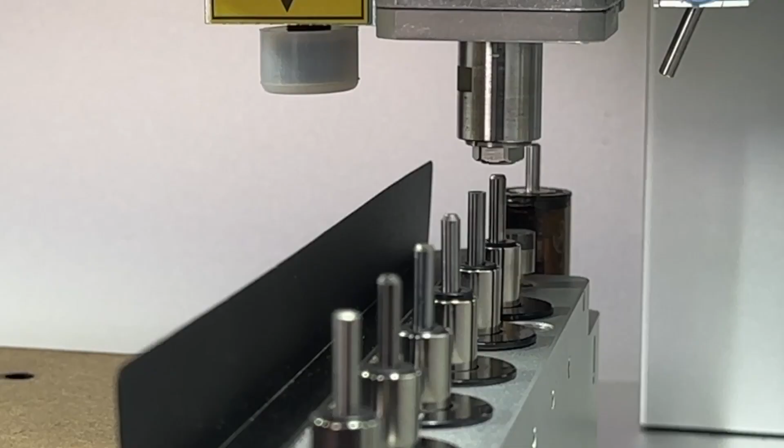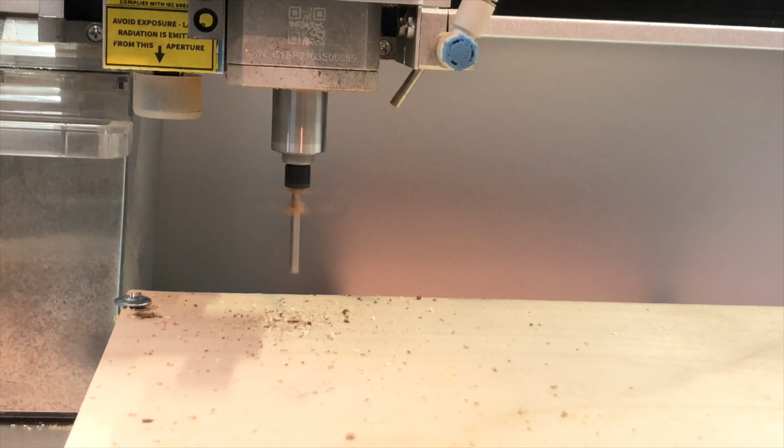Everyone, Jason from Makera here with another project tutorial, and in this one we're going to create a backyard table game using Makera CAM and the Carvera Desktop CNC. Both the Carvera and Carvera Air are highly versatile desktop CNC machines, allowing you to work with a range of materials, bits, and manufacturing processes to create fun projects like this one. And Makera CAM allows you to import a range of file types to easily prepare your designs for manufacturing too. Now in this tutorial, we're going to look at how to create this game from start to finish, so let's get started.

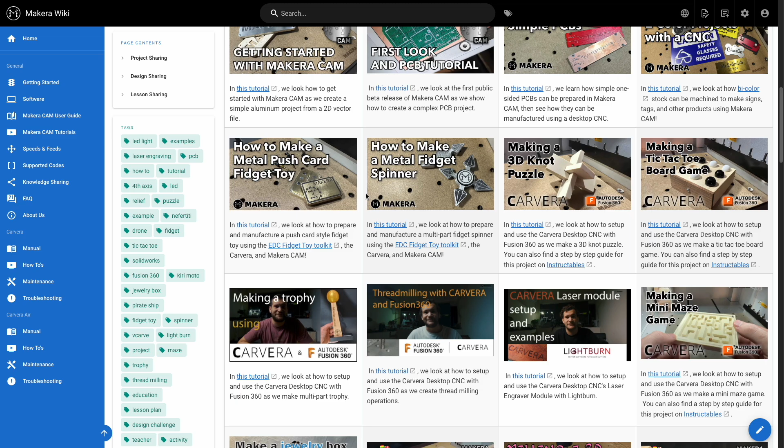You can download the example files used in this tutorial from the knowledge sharing page on our wiki site, or download the completed Makera CAM files instead if you want to get right into machining. There are 3 files needed for this project, one for the top and bottom of the board each, and one for the ball launchers as well, and then an optional file for the engraving design too. Once you have your designs, head over to Makera CAM to begin to prepare them for manufacturing.

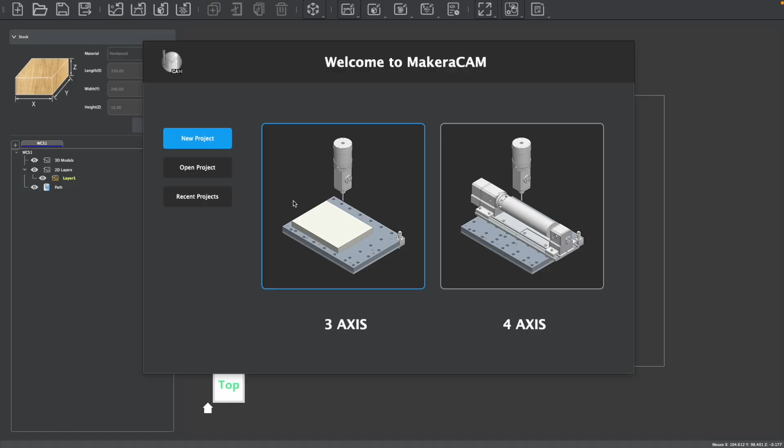So after launching Makera CAM, we can create a new 3-axis project. And the first thing we always want to do whenever we make a new project is to set our stock to match the material that we'll be using. So I'll be using a piece of 3/4 inch plywood, and plywood usually machines best as a hardwood. And the length of my plywood is about 330 millimeters by 240 millimeters by 19 millimeters. And again, it's 3/4 inch plywood, so that's just over 19 mil, but this should be perfectly fine as we're going to machine through.

Whenever you're going to flip something horizontally, like we'll be doing in this 2-sided project, it's really important that your horizontal length is very accurate, right? So that way your part is oriented correctly during the flip. So this is the most important measurement. So make sure you have that down correctly there. And once you've adjusted your stock, you can click OK.

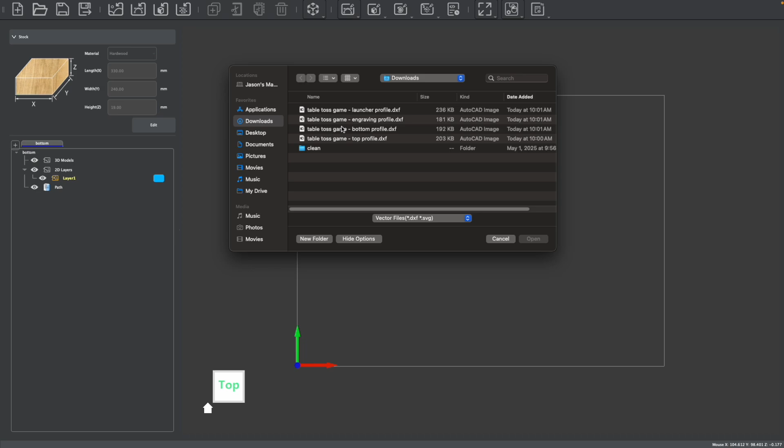Now, this is going to be a 2-sided project, which means we're going to have 2 work coordinate systems. So I'm just going to real quick edit the work coordinate system 1 that we have here, and I'm going to rename this to be bottom, because we're going to machine the bottom first. And then I can import the DXF file for the bottom. So I have my Table Toss Game bottom profile that we've downloaded from the wiki. So I'm going to open this up and import this in, and you can see we have our bottom profile.

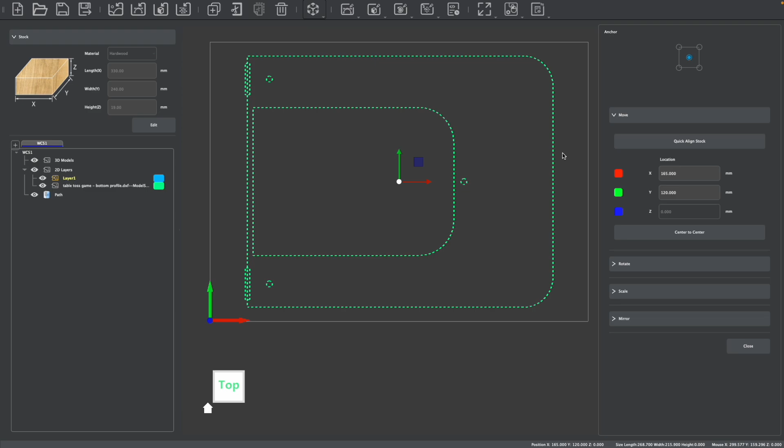So then what we can do is we can select this whole graphic and we can transform it. So I'm going to first rotate it 90 degrees, and then I'm going to align it. And if I click Quick Align Stock, that'll just center it perfectly in my stock here. Okay. Now, before we get too far in preparing the toolpath, let's go ahead and import all of our graphics and align them for the top as we go here.

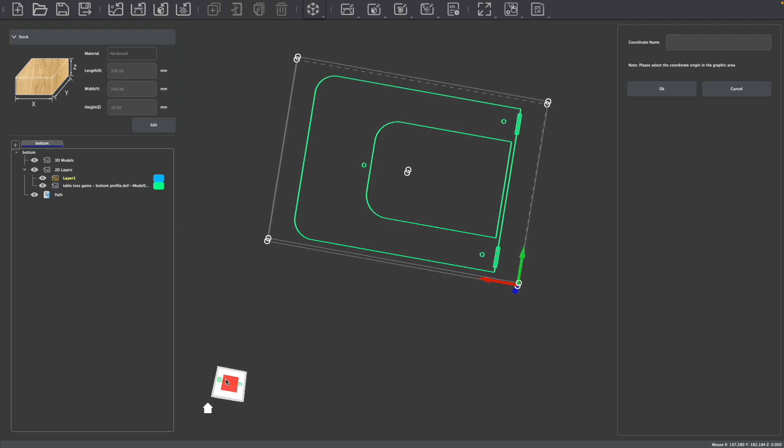So I'm going to click New Coordinate System, and I'm going to rotate this just like I would actually flip my stock. So I'm going to horizontally rotate it here, and we have to select the origin point for what will be the new bottom left corner when we flip our stock, which would be this corner right here. And I can rename this coordinate system to be top. And whenever you make a new coordinate system, you'll see you have a whole new collection of layers and graphics here. So we have different graphics and paths for the bottom and top profile. We can still see the shadow of our bottom profile here.

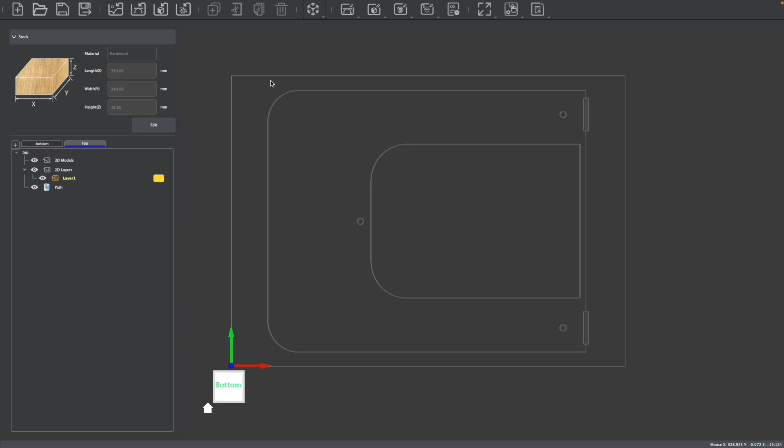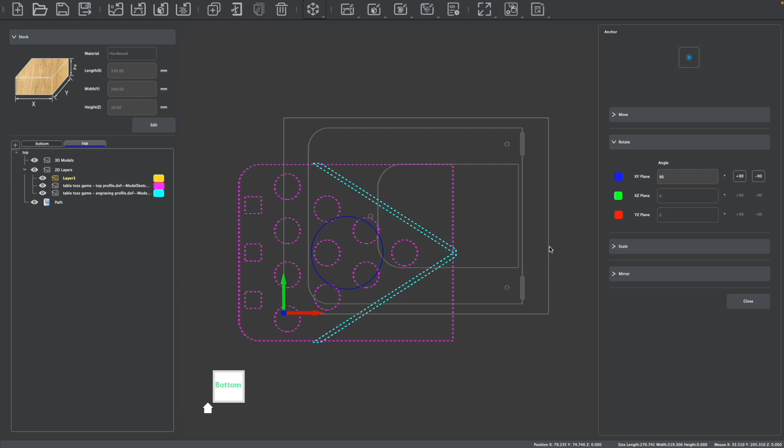So let's go ahead and import the graphics for the top of our design. So that's going to be the top profile. And before I move anything, I'm also going to import the engraving profile, which is optional if you want to engrave this stripe here. I'm then going to select both the top profile and the engraving profile. And again, we can use the transform tool to rotate this. And I can either use Quick Align Stock or manually position this, but I really want to center it perfectly on my bottom graphic. So the easiest way to do that is using center to center.

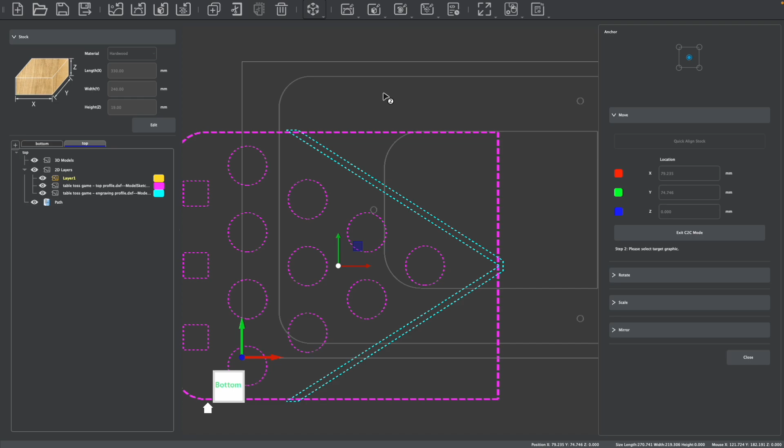So if I click center to center, I'm going to select my reference graphic, which is going to be the outline of this top profile. You can see it's highlighted a little bit more bold now. And I'm going to select my target graphic, which is the outline of my bottom profile. And that will automatically center my designs. And of course, because this is a symmetrical design, top and bottom, we can see that those lines overlap, right? So I'm going to close this.

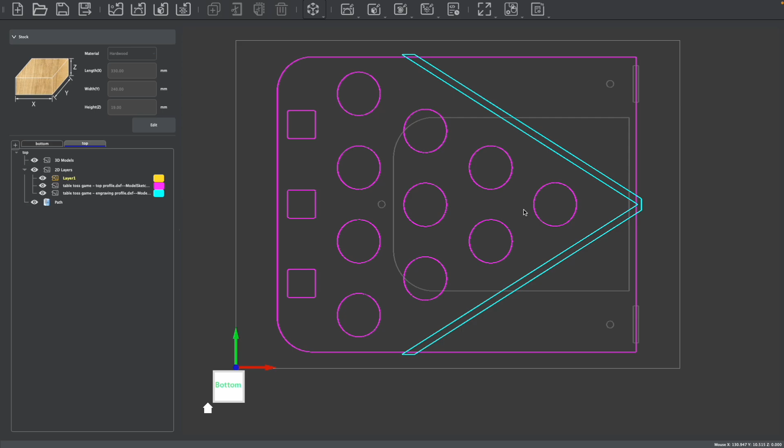Now we have our graphics fully imported for this design, and we have our flip set up, and we can start to prepare our toolpaths. So let's head back over to the bottom work coordinate system. And what we'll do is we're first going to make some alignment holes that we'll use to flip our stock around when we do our horizontal flip. So we're going to use the create tools here to do this. So I'm going to create a new 2D model,

and we're going to make a circle that has a diameter of 1/8 of an inch, or 3.175 mil, or whatever size pins and drill bit you want to use. So I have 1/8 inch alignment pins that I'm going to use, so I'm going to drill an 1/8 inch hole. And I'm just going to go ahead and draw a circle somewhere here on my stock on the left-hand side. It doesn't actually matter where it is in relation to your part, because again, our parts are already aligned.

So as long as we flip our stock horizontally and these pins are perfectly centered on the stock, then that's perfectly fine. So if you're a little high or a little low in terms of the center point of your design here, that's not actually going to make a difference. So it's not really crucial where this is. However, if you did want to set a really accurate position for this, you could head over to the transform tools and go to the move tools. You could manually set X and Y positions and align this perfectly.

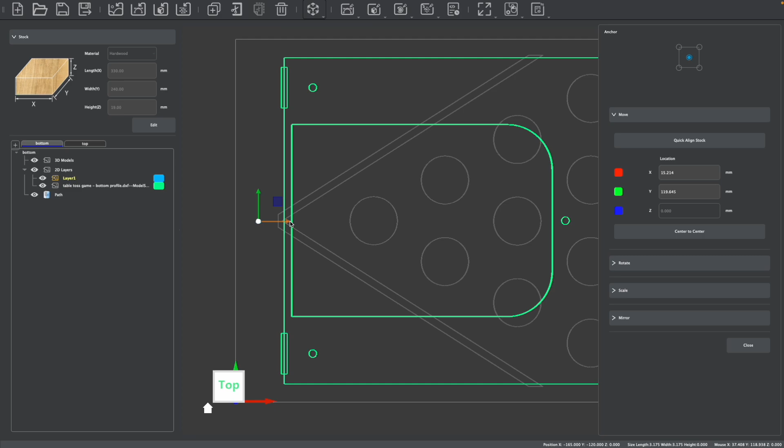But what we're going to do is we're actually going to mirror this over our stock center. So I'm going to click mirror down here, and I want to create a copy of this hole, and I'm going to mirror it horizontally over the stock center, not the center of the shape. So if I click generate mirror, you'll see that that gave me a hole on the other side, perfectly centered on my stock. So this is where I mentioned that 330 mil length of your stock is really important. So that way when you flip this guy horizontally, everything is nice and aligned for your top and bottom. So we have these holes. I'm going to close that.

And with the holes still selected, this will be our first toolpath. We're going to create a 2D drilling operation to drill through our board and also into a piece of wasteboard below, so that way we can insert our alignment pins for the flip. So the end depth needs to be much past the stock, right? We need to drill through the stock and also deep enough into a piece of wasteboard for our alignment pins. So that's going to be, for me, about 25 millimeters. So that should be a nice hole depth of about 5 or 6 mil after I drill through my 19 mil or so stock, right?

And then we don't need to change our clearance heights or anything like that, probably, unless you're using any types of fancy fixtures, but we do need to select a tool. And you would typically grab a drill bit for this, but I don't actually have a drill bit long enough to do this hole. So I'm going to use a single flute end mill, and I'm going to select my 32 millimeter single flute end mill, and I'll just do a drilling operation with this single flute flat end mill. And as long as I have retract enabled, that should be perfectly fine.

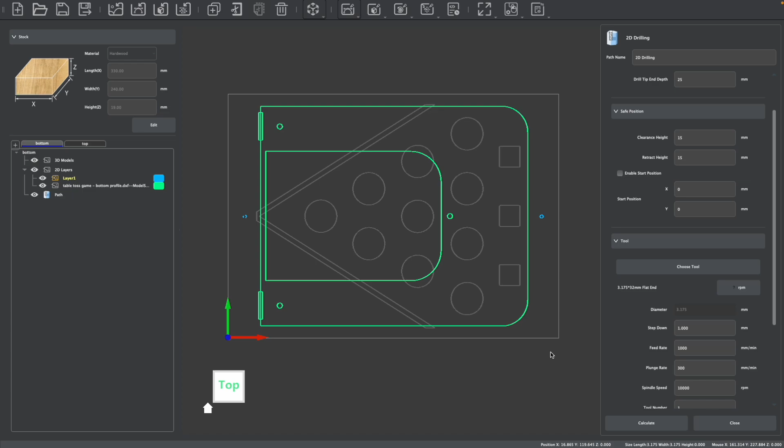So I've selected this end mill. You'll see that hardwood is selected for my machining feeds and speeds based on our stock that we set earlier. And I'm not going to change any of the defaults. The only thing I'm going to do is change my tool number, because I'm going to have this 32 millimeter end mill assigned to slot 2 in my Carvera's automatic tool changer.

So you can assign the tool number as needed. And then again, this is where I said we want to have a peck drilling function. So let's enable a fixed Z height retract, and 1 millimeter is fine. So that means that each step down, each millimeter step down, this drill bit or end mill will back out to a fixed height of 1 millimeter. So that way it's not just plunging straight through. That should stop us from breaking our bit and also overheating or burning anything and causing any damage there.

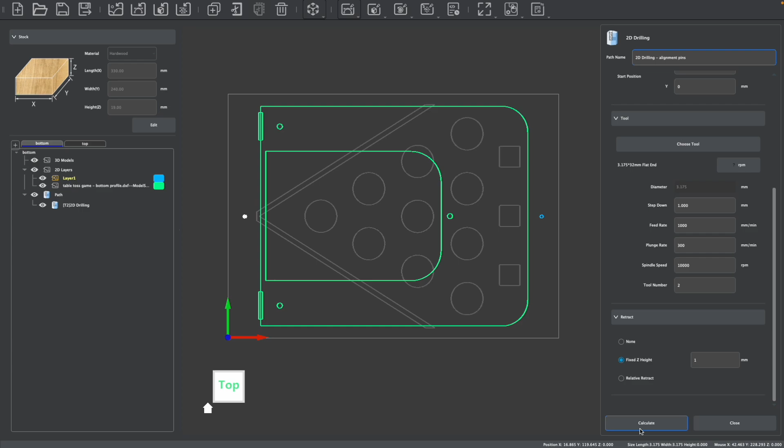So we'll drill a little bit more slowly. So we can calculate that. And when you have a lot of toolpaths, it's always a good idea to keep yourself nice and organized. So I'm actually going to rename this path to be 2D drilling alignment pins, like so. And that'll just keep my layers here nice and organized.

So let's close this. And the next thing we'll do is we have a bunch of pockets to clear out, right? So I have these little magnet holes that will hold us shut when the board is shut there. So I'm going to select my 3 magnet holes, and let's create our first 2D pocket operation. I'm going to name this to be 2D pocket magnets. My end depth can just be 2 mil for my magnets here. So we'll go 2.5 mil for the magnets that I'm using. So end depth of 2.5.

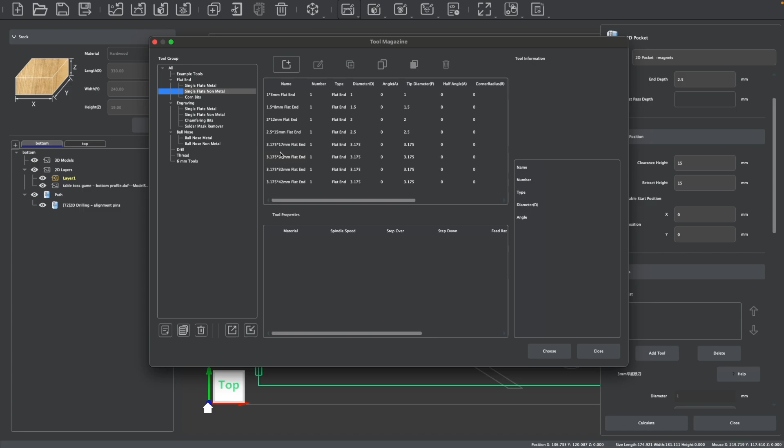For the tool for this guy, you can use a lot of different tools. I'm going to use my 25 millimeter end mill, which is honestly quite a bit longer than what I need, of course, to do just a 2.5 hole. So ideally, you'd use a shorter bit, maybe a 12 millimeter end mill or something like that. But I want to use as few tools as possible, do as few tool changes as possible.

So a 3.175 by 25 millimeter end mill set to hardwood should work fine. So I'm going to choose that. Again, default feeds and speeds are great. You can check your tool number, but I do have this loaded. This is one of our example tools, so this is loaded in tool slot 1.

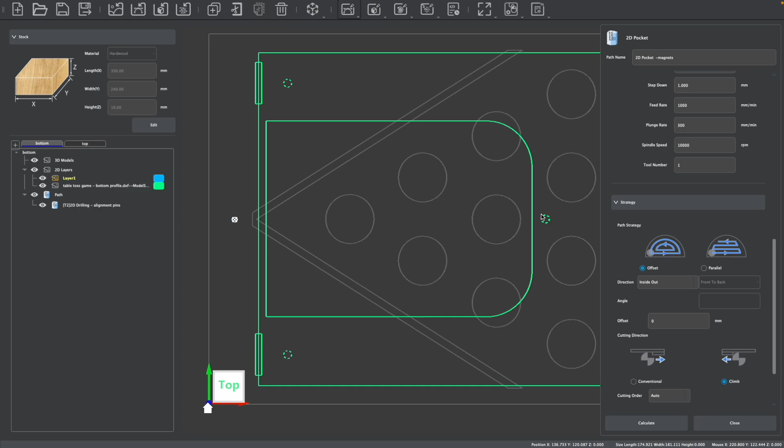Path strategy, we can do offset, which will work fine for working around these concentric holes. We don't have to change any other settings. We don't need ramping because it's not a very hard material. So I can just go ahead and calculate these pockets. There we go. All right.

Next toolpath that we'll do is our hinge pins. And this is going to be another 2D pocket. So I'm going to hold shift and select the 2 hinge pins. And we'll make another 2D pocket. I'll rename this to be hinges. And the reason that we're doing this as a separate toolpath is we have a very different end depth. So I'm going to set the end depth for this guy to be 12 millimeters. Everything else is going to be the same.

So same tool, same feeds and speeds, same tool number, offset strategy, still fine, no ramping needed. So I can just very quickly click calculate because Makera CAM will keep the same settings as your previous toolpath, which is kind of convenient. So there we go. That's nice and good.

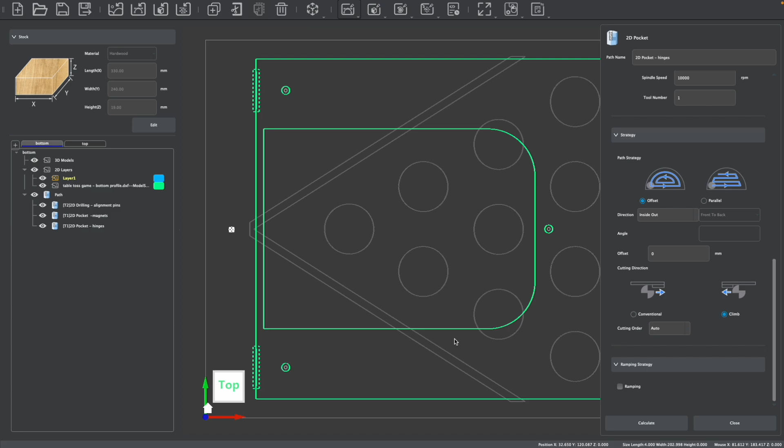And you know what? Actually, this center pocket is also going to be a depth of 12 millimeters. However, I'm going to use a different strategy for this center pocket to clear it out a little bit quicker. So I can close this and create one more 2D pocket toolpath. This time we're going to select this center pocket, and I'm going to call this center pocket.

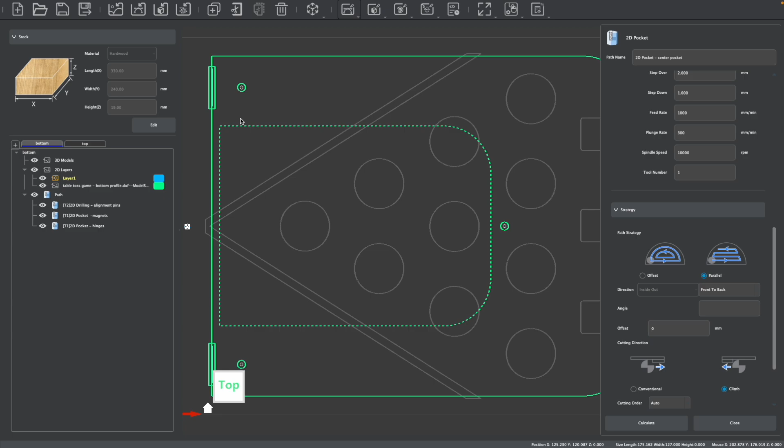Same depth, same bits, same feeds and speeds, but for this one, we're going to set a parallel strategy, which instead of working around in a concentric pattern like this, it's going to pan back and forth. And that's usually better for clearing out a large amount of material. So we'll set this to be a parallel strategy. Again, no ramping is needed, so we can calculate that.

If I just zoom out for a second and orbit around, you'll see that we have all of our toolpaths here drawn so far. So we have our nice little toolpath lines there. And looking at that, it looks like I missed a hole for my alignment pin.

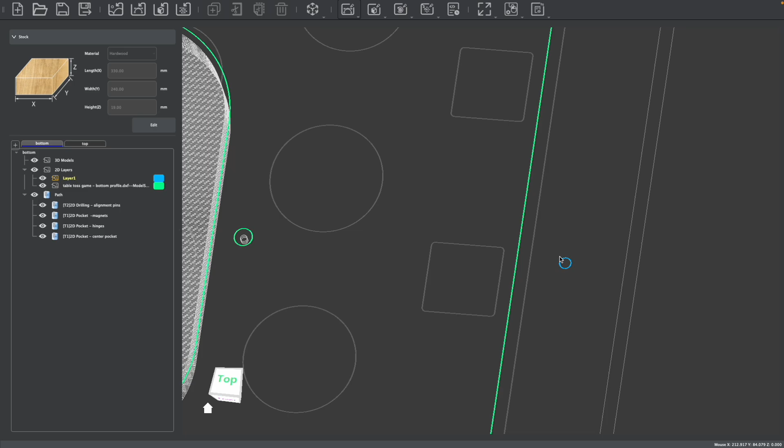Let me go back into my alignment pins and make sure that both of my holes have been selected. Looks like I accidentally missed one of them. Let me recalculate. There we go.

So we have one more toolpath to do for the bottom, and that is just going to be a chamfered lip. We're not going to cut all the way through our part, so we'll save that for the top side, but we are going to do a chamfered edge so that when it does cut all the way through, you'll have a nice chamfered finish, sort of like a routed edge. So let's select our outline and create a 2D chamfering toolpath.

Our chamfer depth for this could be 0.5 mil. You could, of course, adjust that if you wanted to chamfer a little bit more or less. And then the tip offset is going to be 0.2 for the size chamfering bit that I'm going to use.

Then we're going to go ahead and choose our tool, and from the examples tools, I'm going to grab our 0.1 mil 90-degree chamfering bit. Hardwood selected to be our feeds and speeds. If you wanted to change these, you could, but I think the defaults should be just fine. You could, of course, change your tool number, but this is loaded in tool 6 for me, so that's perfect.

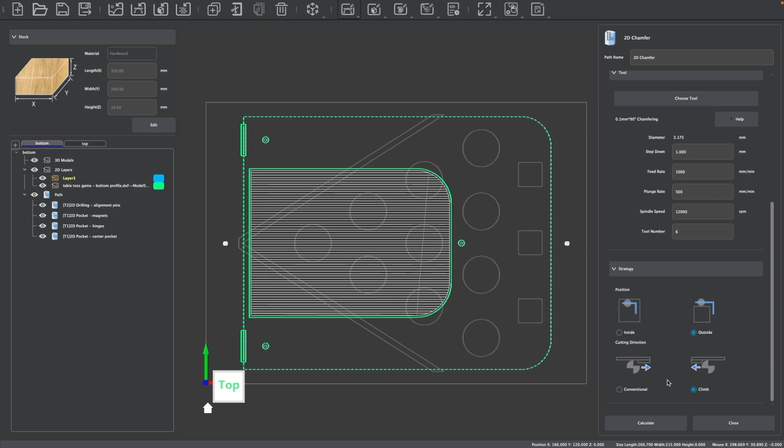We want to run along the outside of our part, and climb milling is perfectly fine. So I can calculate this, and you'll see that we have a very small chamfering line that runs along the outside of our part. So I'm going to close that.

I didn't name this one because it's kind of obvious, 2D chamfer. We only have one chamfering toolpath. And if I hide my designs so we can just see the toolpaths, you'll see that we have everything prepared for the bottom. It's a good time to press save if you haven't yet, so we can save this project.

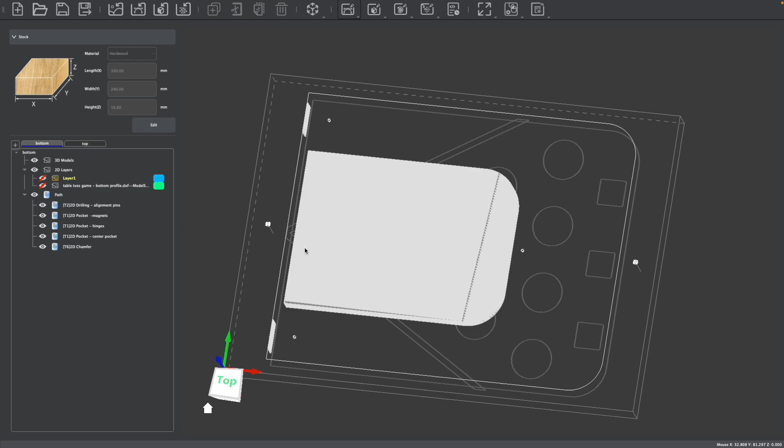And then we can head on over to prepare the top, right? I'm sorry, this is everything that we have prepared for the bottom. Now we can flip and head over to our top graphics.

And if you find that it's a little distracting to see the toolpaths on the bottom, you could always hide your toolpaths, so that when you flip and look at the top, all you see is your top design. So the first thing you might want to do is this engraving profile, depending on how you're going to make the engraving profile. I'm going to use the laser to actually engrave this, the built-in laser of the Carvera or the optional laser for the Carvera Air. So I'm going to save this for the end.

But if you were going to mill it, if you were going to do, let's say, a 2D pocket using a V-bit or a ball nose bit to actually clear this out and engrave it using a milling function, you'd probably want to do that first because you typically start with your smallest operations and then move to your biggest ones. But again, I'm going to save this one for the end because I'm going to use the laser.

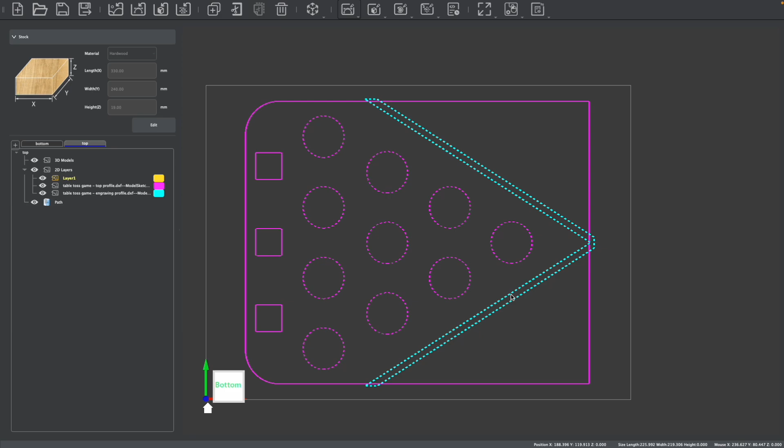So my first operation is actually going to be all of these holes for the cups here. So if I just select my holes and deselect my engraving profile, we can go ahead and create a 2D pocket. And these are going to be for the cups, so I'll name this to be cups.

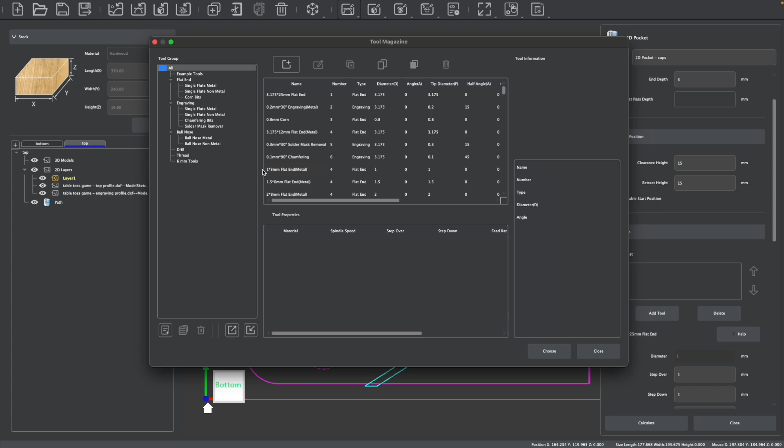And then our end depth for this could be pretty shallow, so I'm going to do 3 mil for our end depth. And then for our tool, I'm going to select the same 25 millimeter end mill that I was using earlier, same feeds and speeds, same tool number. We can do an offset strategy for this, and no ramping is needed. So I can just calculate that real quick.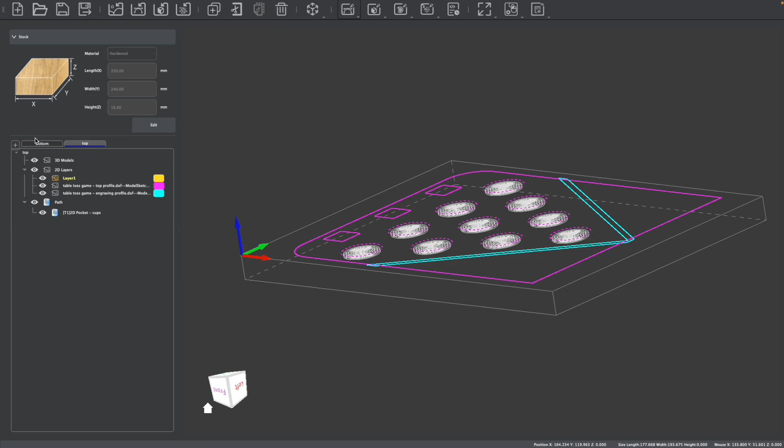And actually, what we want to check real quick is to make sure that we're not going to accidentally interfere with our bottom pocket. So let me head back over to the bottom, enable our toolpaths, and then when I look at this from the top, we want to make sure that I don't accidentally plunge. If I look at this just from a side profile, I'm not going to accidentally plunge in.

So you can see we have plenty of buffer here. That looks perfectly fine in terms of our 3 millimeter holes there. So that's good. All right.

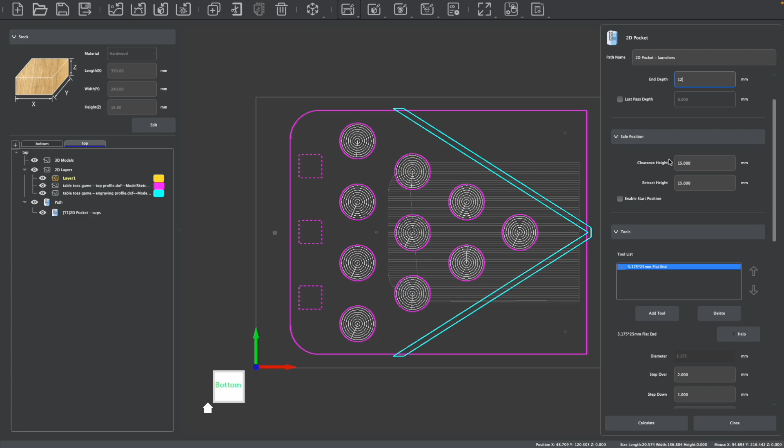Next, we're going to do the pockets for the launchers. I'm going to grab these 3 square pockets and make a 2D pocket toolpath. We'll call this launchers. These guys are going to be milled quite a bit deeper, so I'm going to mill this down to 12 millimeters, so that the launchers can slot in for our table game. Same bit though, same feeds and speeds, same strategy, so I can go ahead and click calculate. Again, the only reason we had to make this a separate toolpath is because we have 2 different end depths, right? 2 different end depths.

And then we have our outer line here. So the first thing we're going to do is we're actually going to cut all the way through. Let's go ahead and select this outer line and make a 2D contour toolpath. Okay, this is the first contour toolpath we've made, right? This is going to be our outer profile. Our end depth is going to have to go through our stock, so for me I'll make that 20.5 mil, just a bit over.

Again, I'm using 3/4 inch, so it's not quite 19 millimeters. It's a little bit thicker than that, so I want to make sure I go all the way through my plywood. So I'm going to go to a depth of 20.5 mils, like so.

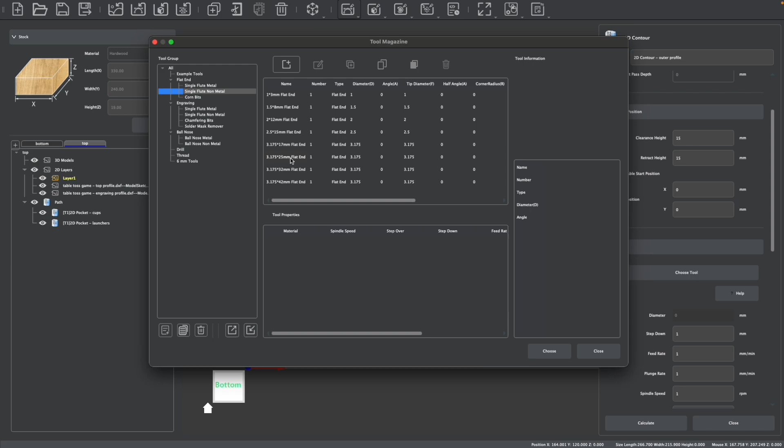I'm going to need a nice long tool to do this. In theory, the 25 millimeter end mill is long enough, but when that's cutting really deep, there's not going to be a lot of bit left, and that could be getting a little hot. It's also not going to allow for really good chip evacuation if I'm putting this bit pretty much to its full depth. So I already have the 32 millimeter bit ready to go.

So I'm going to select my 3.175 by 32 millimeter bit, set to hardwood. I'm not going to change my feeds and speeds, but I do want to change my number so I don't have to reload my tool changer. So that's tool 2. We want to run along the outside of our profile here, and we do want tabs to hold on to this part as it's machining.

So I'm going to create some custom tabs, and whenever I'm working with wood, I like to use square tabs, and I'm going to make these tabs quite a bit bigger to make sure I hold on here. So I'm going to make them 20 wide by 5 millimeters tall, because it's pretty easy to cut some wood tabs. And I'm just going to click add and maybe add 4 tabs along the perimeter of my design.

I want to avoid the front just because of the hinge pockets that we're going to cut, like here. So there we go. So then let me calculate this. And if I just orbit, you can see we have our part that cuts all the way through our stock, as well as our tabs, which looks great. So we can close this toolpath.

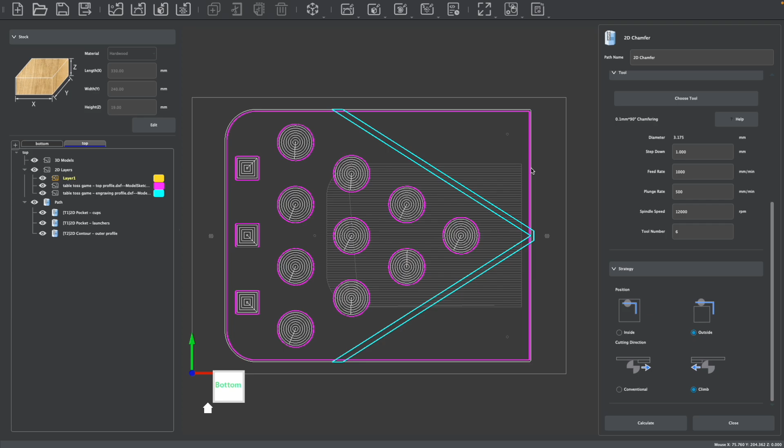And then we're going to do a chamfering path, just like we did on the bottom. So we'll do a chamfering path now that this edge has been cut. We're going to keep the same settings that we did earlier: a depth of 0.5 millimeters, an offset of 0.2 millimeters. We can select our chamfering bit, like so, and we're going to run along the outside. Calculate that. Oops, sorry, let me click on my outline and then calculate that. And now we have our chamfering toolpath.

So there we go. That is the top prepared, like so. We already have the bottom prepared. And then all that's left is this engraving profile, which again, if you were going to mill it, you could have done it much earlier. But because I'm going to use the laser, what I'm going to have to do is vacuum my part really thoroughly before I actually start to laser engrave this, to make sure there's no dust that could possibly ignite during the laser engraving process. So I'm going to save this guy for the end.

So now, with this engraving profile selected, let me make a laser vector toolpath.

I'm going to call this the laser engraving profile. We have to choose the right feeds and speeds for our materials, which you can grab on our wiki site for some good starting points. I know that hardwood typically runs around 500 for the speed and 40 for the power, which should work well.

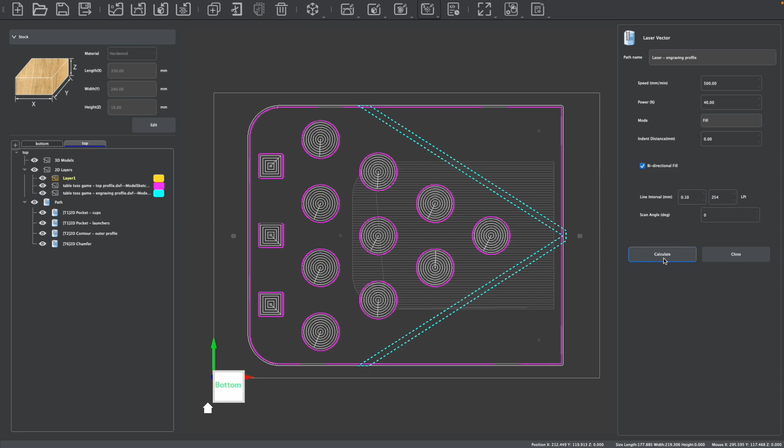The mode here is going to be fill, because I want to engrave this entire stripe. I'm not going to change any of my intervals or angles or things like that, so this should all be fine.

So there we go, now we have all of our toolpaths generated. It's a good time to press save, and all we have to do is export these for machining.

Let me flip back to the bottom. I'm going to right click and save all of these paths at the same time. If you wanted to change any of your tool numbers or double check your tools that you need, now's a good time to do it.

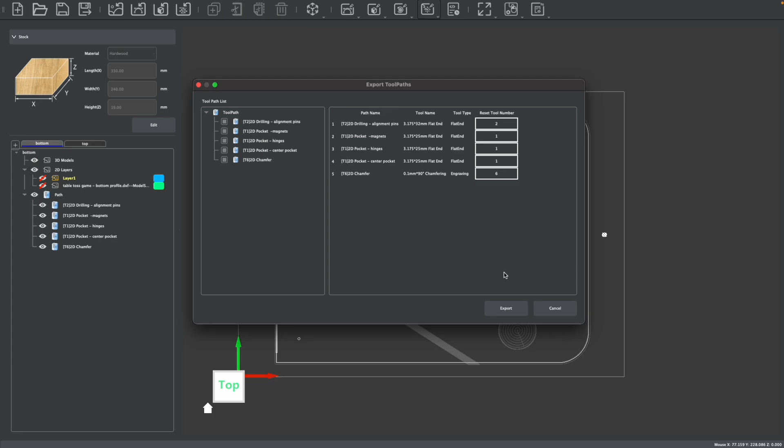Let me export this for the bottom, and let me flip back to the top and export these. But again, I don't want to export the laser as a single toolpath - I want to do that separately so I can pause the machine and prepare it for laser engraving before I do. So I'm going to deselect the laser profile and export this for the top only.

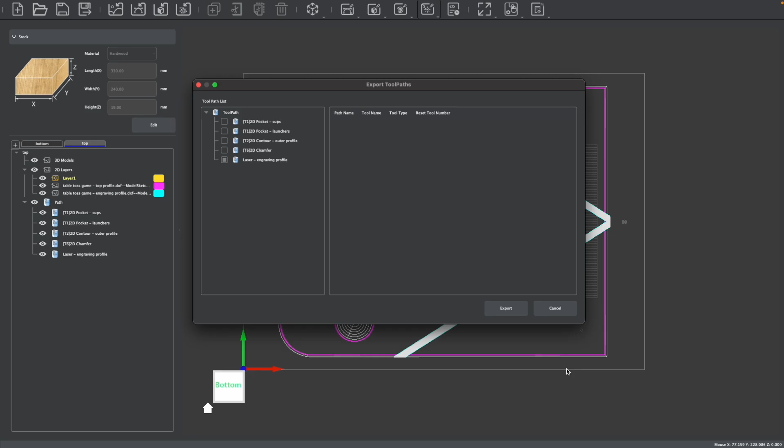Now I'm going to right click just the laser profile and export this on its own, and I'll save this as something different. And we have all of our toolpaths exported for this.

Before we start to manufacture it, we have to prepare our launchers. So after you press save, let's create a new Makera CAM project here, a 3-axis project. I'll be using the same size stock, so I'm not going to adjust this, although there won't be any flipping, and you could also use a much smaller piece of material and adjust your stock size, but I'm going to keep it the same.

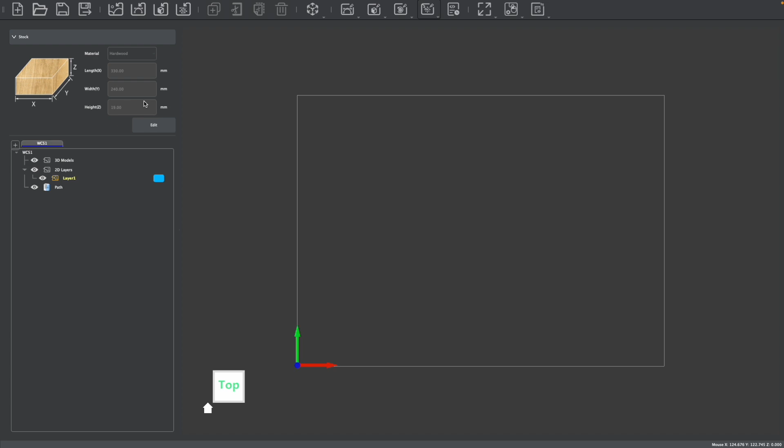With that set, I'm just going to import the launcher profile. The first thing we can do is reposition this on our stock. I'm just going to drag this down to be a little bit closer to my origin point, leaving some room for clamps and things like that.

As you can see, you need a much smaller piece of stock, so you could also adjust your stock size, but you can always reposition this later in the Carvera Controller app, which we'll look at in a few moments.

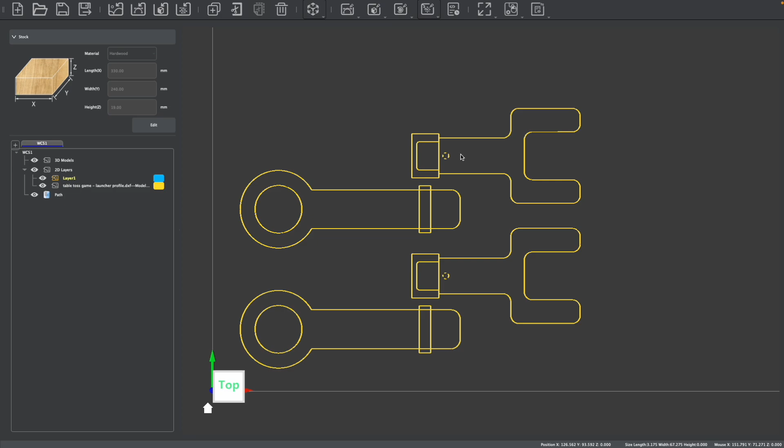So let's prepare our toolpaths for this. The first thing I'm going to do is machine these holes for some pins we're going to insert. Let me select these two holes, and we can create a 2D drilling operation.

For this, we want to drill just a little bit in - we don't have to drill all the way through. These are going to be pins that actually hold some rubber bands for our launchers, so I'm going to set my end depth to be 5 millimeters.

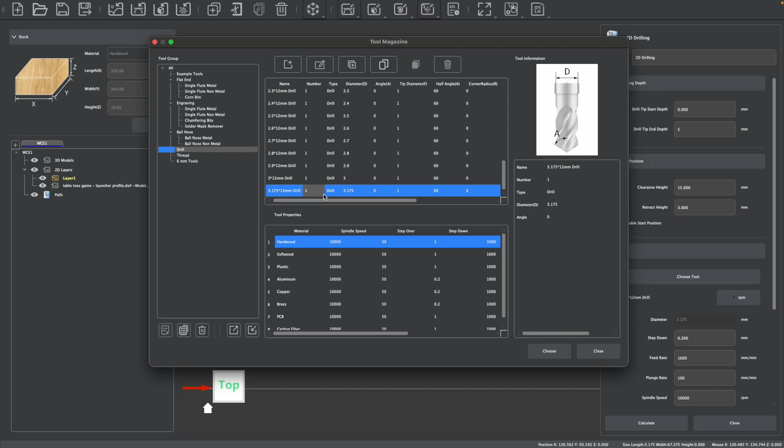I'm going to choose a drill bit for this that I have - a 3.175 by 12 millimeter drill, with my feeds and speeds set to hardwood. I have this loaded in tool slot 4, so I'm not going to change any of my feeds or speeds, but I do want to change my tool number to match where I have this in my tool changer, if you're using the Carvera.

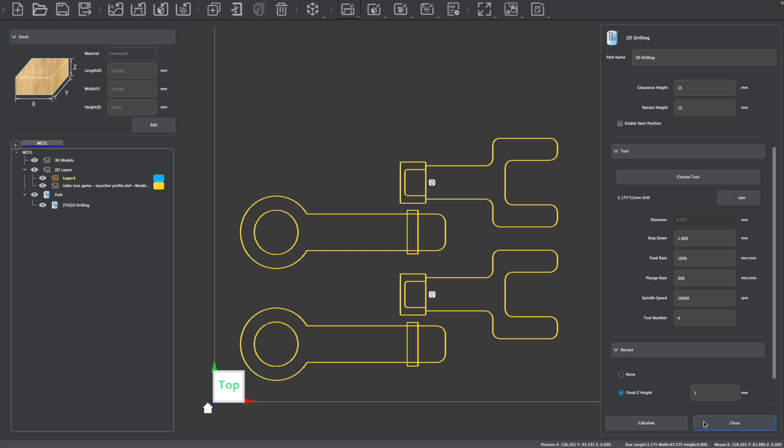And we do want to use a retract like we did before, so I'm going to keep my fixed Z height retract and calculate this. Alright, and then we can close that and move on to our next toolpath.

Which are going to be a bunch of pockets - we have the pockets here, these circular pockets for the ball, we have these two square pockets for a little rubber band, and then we have these pockets, which we're going to use to make our launcher fit a little bit more loosely in our board so you can swivel it around.

So I'm going to hold shift and select all of these pockets, all of them here - so we have 6 pockets.

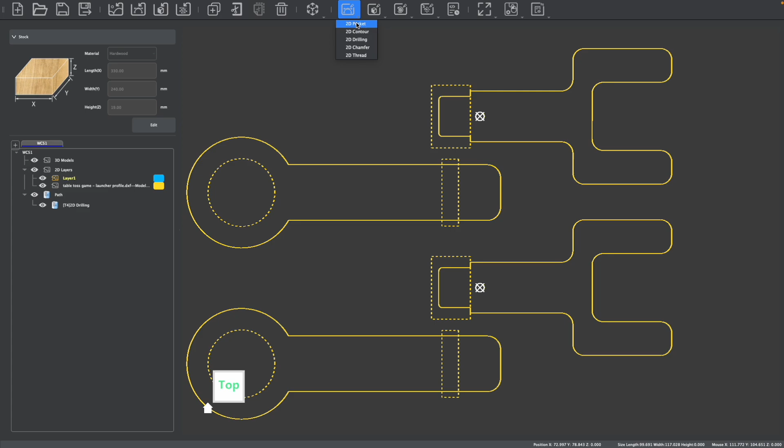And I'm going to use one toolpath because they're all going to be cut to be the same depth. So 2D pocket, and I'm going to set a depth of anywhere between like 3 and 5 millimeters should work fine. That'll change essentially how loose everything fits together. So I'm going to leave this to be 5 millimeters, should be okay.

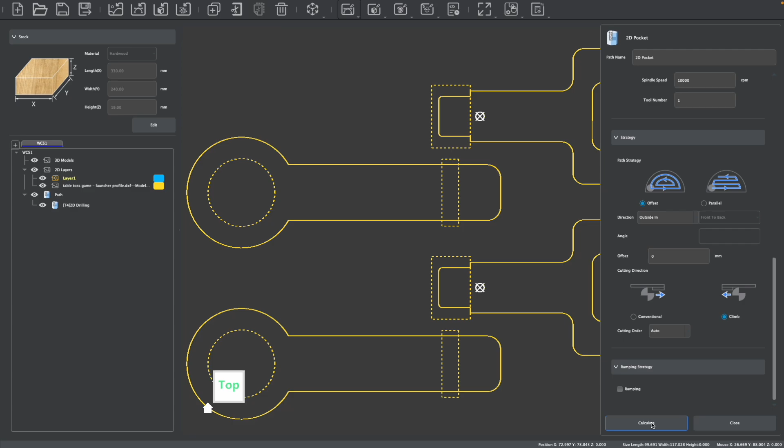I'll set this to be an offset strategy, which should work fine for all of these smaller pockets, and I don't need any ramping or anything like that, so we can just go ahead and click calculate, and that will calculate all of these pockets here to be the same depth. If you want to machine these at different depths, you could of course make different toolpaths like we did for the board, but I think for this launcher, this should work perfectly fine. So we can close that.

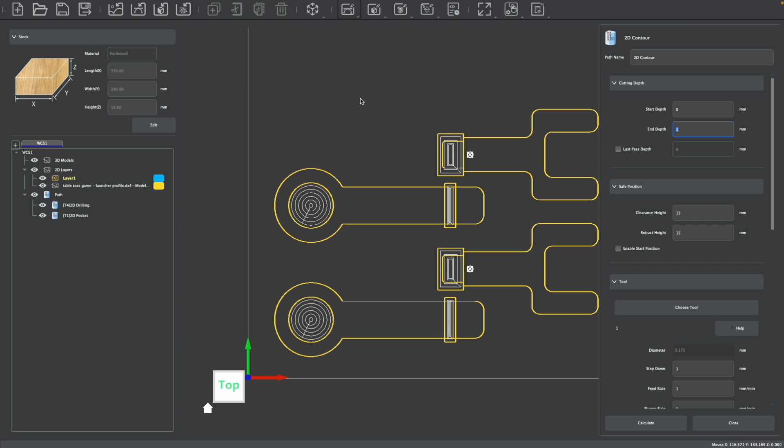And then the last thing we need to do is machine our contours to actually cut out each of these launcher parts. So let's create a 2D contour toolpath. Okay. The end depth has to plunge all the way through our stock, so I'll use the same 20.5 mil that I did for the board. We need a bit long enough to do that, and as discussed, I'm going to use my 32mm end mill to do this. So I can select that tool. I'm going to change my tool number to match where I have that loaded in tool slot 2.

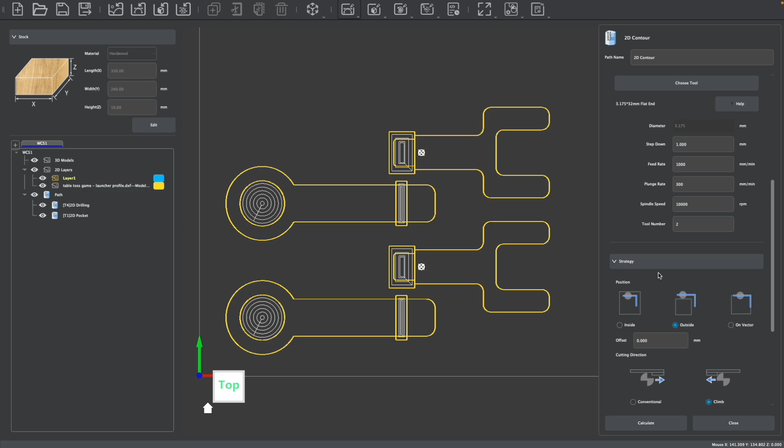And we're going to run along the outside of all of our lines here. I also need to make sure that the lines are selected. So holding Shift, I'm going to select all 4 outside profiles too. Then we can enable tabs. And just like before, I'll do rectangular tabs, although I'm going to make them a little bit smaller than what I had on the board. These are much smaller parts. So I'm going to keep them to be 10mm wide, but still 5mm thick.

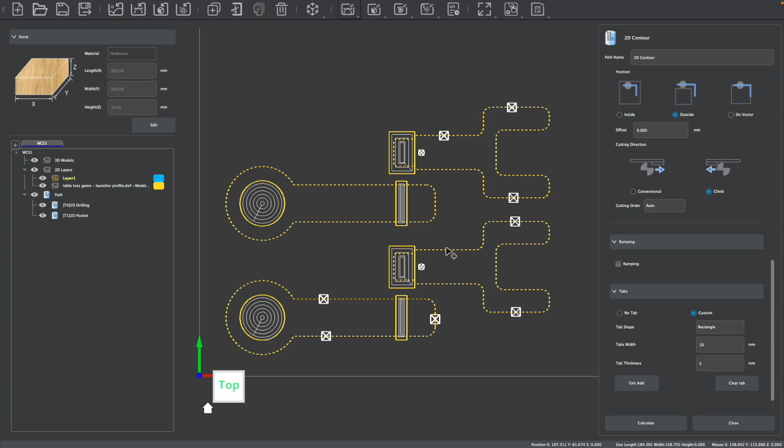And I'm going to place these on my parts on some flat areas. So I'm going to put them on wherever I have some flat edges, avoiding areas that would be really difficult to cut the tabs away. So, for example, I don't want to put them on any of my curves or inside of this inner pocket. That would be a little bit more difficult to cut. So just putting them on flat sides of my parts, and then we can calculate.

All right. So then we have our toolpaths here for everything we need, for our pockets, our pilot holes there, and of course our contour cuts for the launcher. So I'm going to save this and then export these paths. So then we can start to prepare our CNCs for manufacture.

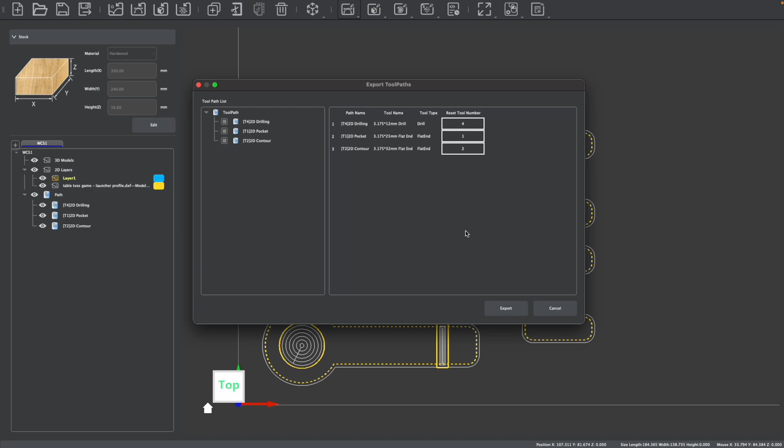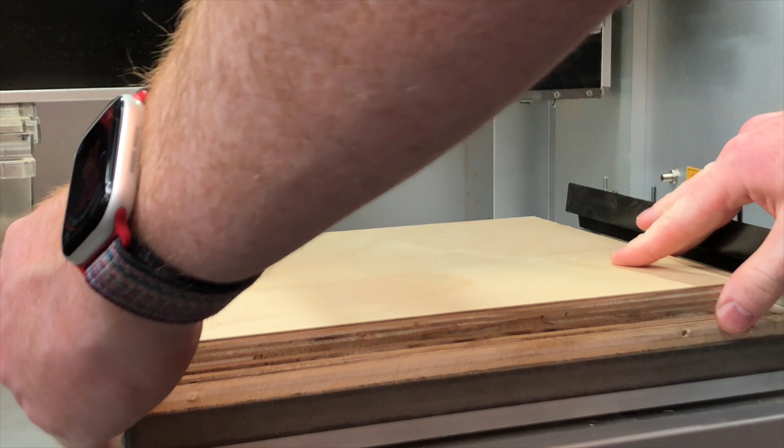As this is a larger design, I'm going to be aligning my stock without using the corner clamp. Additionally, you'll need a thicker piece of wasteboard below your stock so that the alignment pins will be well seated for the flip later on. If your wasteboard has a lot of holes already drilled into it like mine, it's a good idea to mark them before fixing your stock so that way you'll know which ones are the new ones when it's time to insert your pins. With the stock aligned to the edge of my board, I've secured it using some wood screws placed on the outside of my machining area.

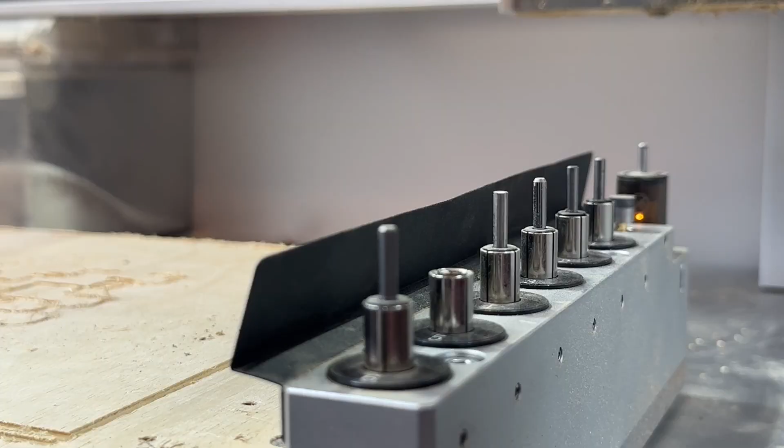We also need to load our tools into the Carvera's automatic tool changer in the slots that correspond to the numbers we assigned in CAM. Starting with the 25mm end mill in slot 1, then the 32mm end mill in slot 2, and then the chamfering bit in slot 6, we should be ready to start these parts. And as this project will be generating a lot of dust and some really big chips, I've decided not to use the Carvera's built-in vacuum, but instead use a larger external vacuum and monitor my machine during the machining process to safely clear these chips manually.

Now moving into the Makera controller app, we can upload our GCode files to our machine for manufacturing. Using the Files menu, I'm selecting all 4 of the GCode files we created earlier and uploading them to my Carvera. With the files uploaded, the Carvera can continue to manufacture them even if I disconnect my computer. Once completed, I can select the file for the bottom of the board to start the manufacturing process.

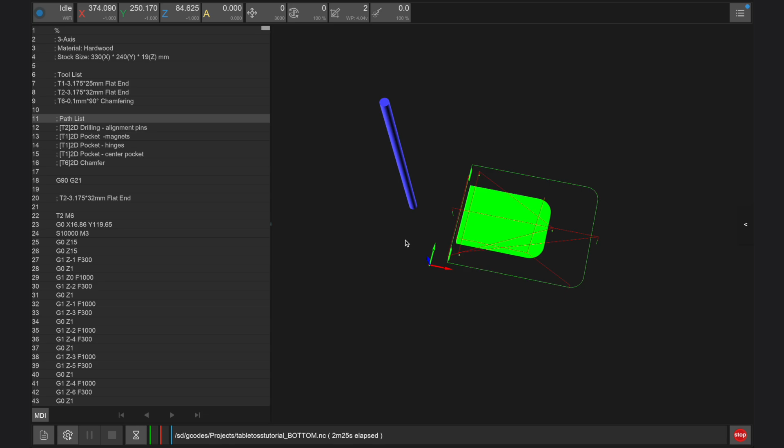In the Config and Run window, we can set up our project. As we're not using the corner clamp, we need to adjust our work origin to be in the corner of the bed, which will be a position of -15mm in the X and Y offsets. We can then enable scan margin, which will trace the perimeter of our design before machining, allowing us to check its location and to ensure that no screws or clamps are in the way.

And we want to enable auto Z probe, which will probe the height of the stock to measure its thickness automatically. We could enable auto leveling as well if we're using a rough piece of stock or one that's either warped or doesn't have a consistent thickness, as this will automatically compensate for any deviations in your stock thickness. But plywood's pretty consistent, so I'm not going to enable this, and once set, I can press Run to begin to manufacture the bottom of my board.

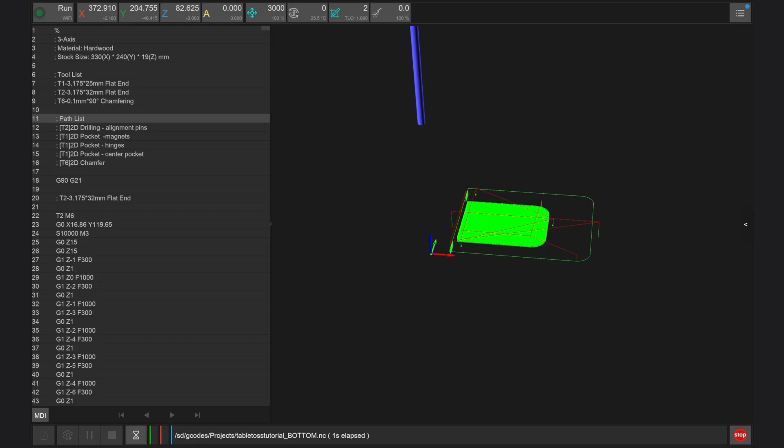After completing the scan margin and probing operations with the wireless probe, the Carvera will pick up tool 2, used to drill the holes for the alignment pins through a peck drilling operation. Next, the Carvera will automatically select tool 1, the 25mm end mill, and begin to machine the different pockets in our design, starting with the magnet holes, before then machining the slots for the hinges, followed by the large storage pocket in the center of the board.

This larger pocket will take a long time to clear with such a small bit and also generate a lot of chips. Keep an eye on your machine to ensure that all hot shavings and dust is being cleared away effectively for a safer and cleaner finish.

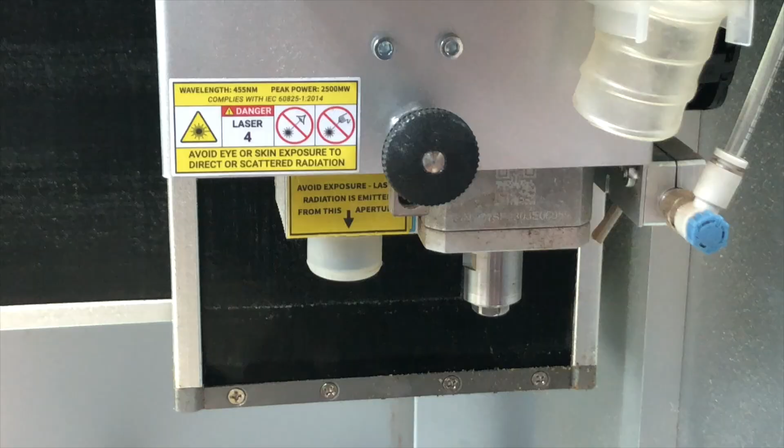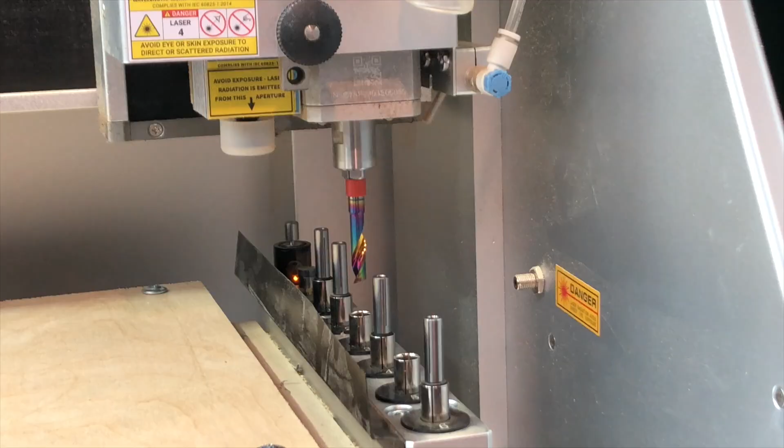This would also be a good opportunity to utilize different size spindle collets for the Carvera or Carvera Air, as these will allow you to work with a larger bit shank diameter to clear out material more quickly in circumstances like this. And the bit adapters available in the Makera store allow you to combine larger and smaller shank diameter bits, meaning that a small bit can be used for the smaller pockets in our design, while the larger bit can be used to clear out the bigger areas and cut down overall machine time.

Once the center pocket has been cleared, the Carvera will grab the chamfering bit to create a chamfered cut around our design. With the bottom finished, we can vacuum the part before unscrewing it from the bed of our CNC. Clear any dust off the bed of your machine, then insert your alignment pins into the holes drilled in our first operation. You can then flip your stock horizontally and align it over the pins so that the recently machined bottom is now touching the bed. With the pins still inserted, re-secure your stock with screws before removing the pins.

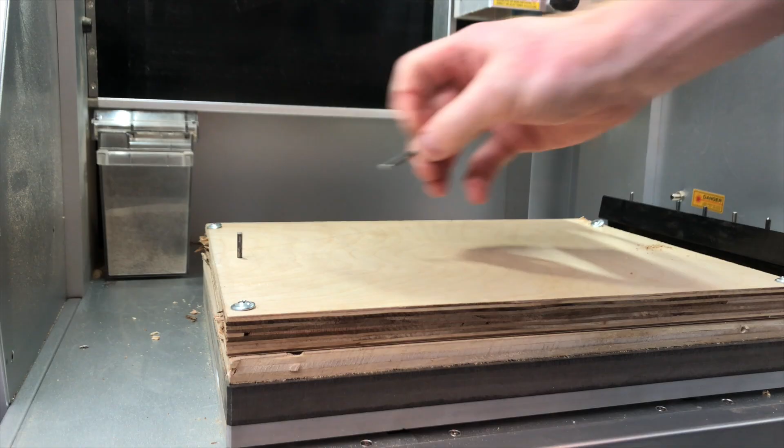Back in the Makera controller app, we can load and configure the G-code for the top of our design using the same offsets and settings that we did earlier. Once set, press Run. After the probing sequence, the Carvera will begin by machining the pockets using Tool 1, starting with the cup holes, then followed by the launcher holes. Again, ensure you're clearing dust during the manufacturing process as needed.

The Carvera will then select the longer end mill from slot 2 to cut out the part through our contour toolpath while keeping the part secured with the tabs. Lastly, the Carvera will grab the chamfering bit to create a chamfered edge on the top of our part as the job finishes.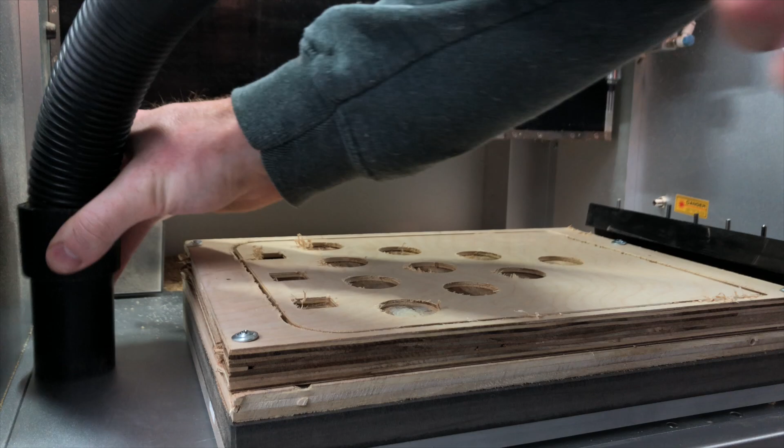Now, as I've chosen to laser engrave the engraving design rather than machine it through a milling operation, I now need to thoroughly clean the work area of any dust which could ignite during the engraving process. I also need to remove the protective cap over the lens of my laser and ensure that I'm working in a safe and well-ventilated environment for laser engraving. Back in the controller app, we can load our G-code for the engraving steps before configuring it for manufacturing.

We want to keep the same work origin offsets and again use scan margin and auto Z probe, which is used for setting the focal length of our laser. But we want to adjust where the auto Z probe measurement is taken from, as we need to ensure that the probing is on the surface of the stock, not inside one of those pockets that we machined earlier. So I've adjusted the auto probe location offsets to be 150 in the X-axis and 40 in the Y-axis from the path origin, just to make sure I don't accidentally probe into one of the pockets that's been machined.

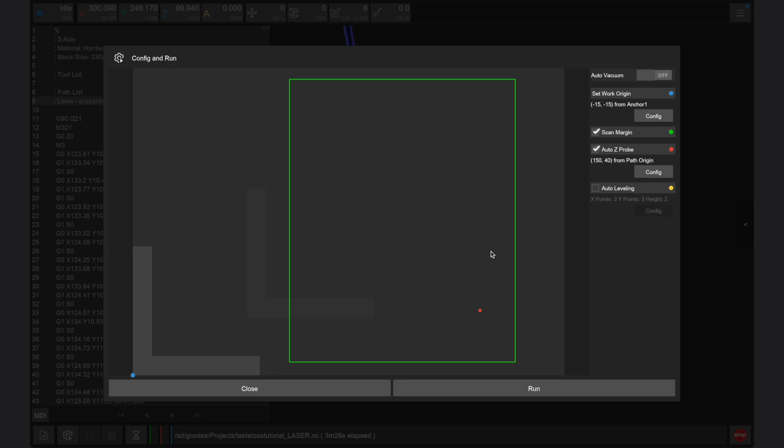Once set, click Run to start engraving. After completing scan margin and probing sequence, the Carvera will begin to engrave the part of the design using the built-in laser module. Again, ensure that you are in a well-ventilated space and always wear eye protection when working around lasers. Once complete, we can unscrew our stock and use a handsaw to carefully cut the tabs holding our design.

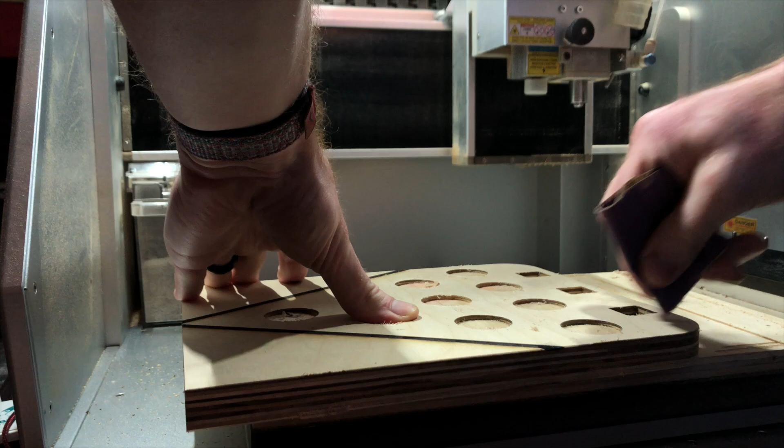We can also use some sandpaper to clean up the areas we cut the tabs off of and clean up any splinters or rougher edges too. You can then repeat these steps to make the same part again for the other side of the game board. And once the parts for the game board are finished, we can then manufacture the launchers.

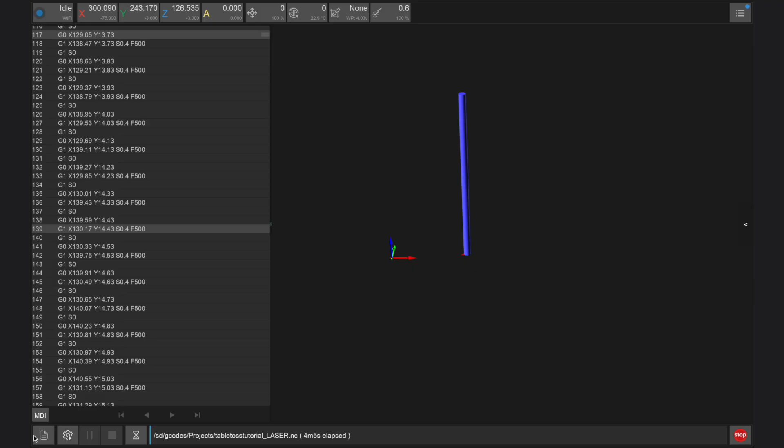Again, start by securing your stock in the bed of your CNC and ensure that your tools are loaded in the correct slots based on your CAM settings. We'll be using the same tools for the launchers, plus a 3.175mm drill bit loaded in slot 4. In the Makera controller app, we can select the G-code file for the launchers uploaded earlier. In the Config and Run window, we'll be using the same settings that we used earlier on, but you can adjust your work origin offsets as needed before running this job.

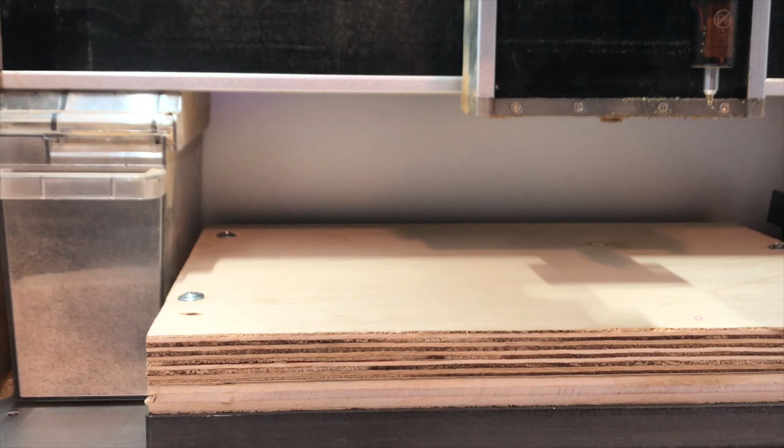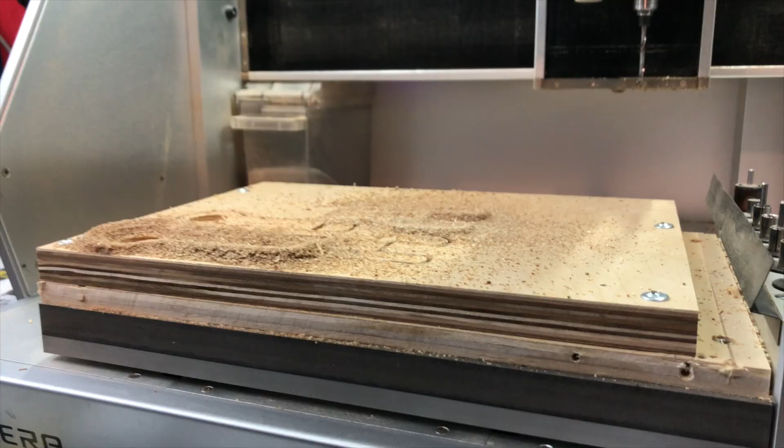After completing scan margin and probing operations, the Carvera will select the drill bit first to drill our 2 dowel holes. Next, the Carvera will use Tool 1 to machine the different pockets in our design, followed by Tool 2 to cut each part out through a contour operation. Once the job is complete, vacuum away any dust and remove the stock from the bed of your CNC. You can then carefully use a handsaw and sandpaper to cut the tabs and clean up the edges of all the launcher parts.

Now, to finish the launchers, we need to carefully drill some additional holes on the side for assembly, either using a handheld drill or a drill press. I'll be using 1/4-inch dowels for my assembly, so I first drilled out the dowel holes made with the Carvera to fit the larger dowels that I have. Next, I drilled holes through the sides of the uprights for the launchers, and then marked holes on the arms of the launchers by placing a pencil through these upright holes. After drilling out the arms, I'm ready for assembly.

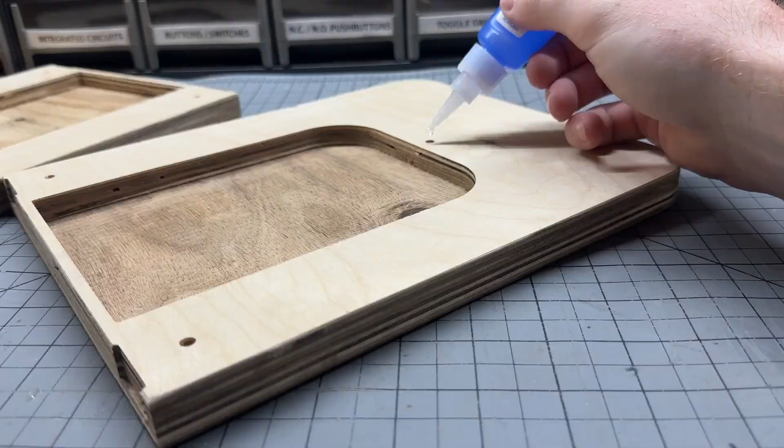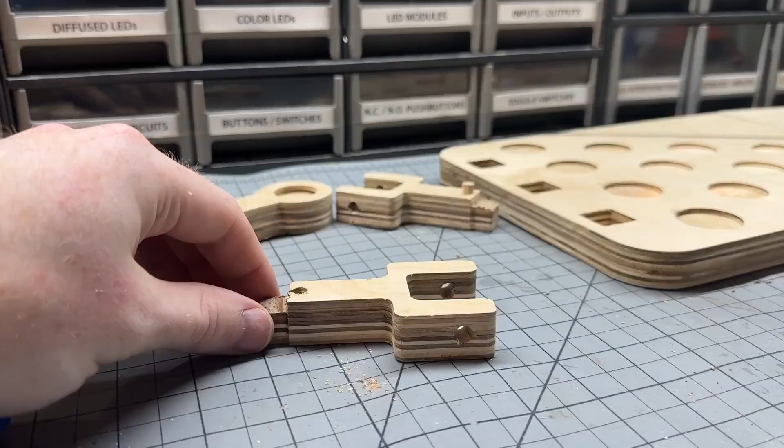The first step for assembly is to glue 3 small magnets into the bottom of each board side. Once the glue dries, align and clamp the 2 halves of the board together and install small 1-inch jewelry box hinges by first drilling pilot holes before inserting the screws for the hinges. To assemble the launchers, you'll need 2 smaller dowels, approximately 20mm in length, and 2 longer ones that are approximately 60mm in length, as well as 2 rubber bands.

The smaller dowels can get pressed and glued into the holes on the front of the uprights, and these are going to be used for holding onto a rubber band. The longer dowels can be inserted through the uprights and arms as a pivot point, but don't glue these as they'll need to be removable for storage. With the launchers assembled, thread your rubber bands around the notch created in the arms and around the lower pin and fire away. You can easily swivel and aim the arm within the board pockets and then disassemble them so they store neatly in the pocket on the bottom of the boards. And that's all there is to it.

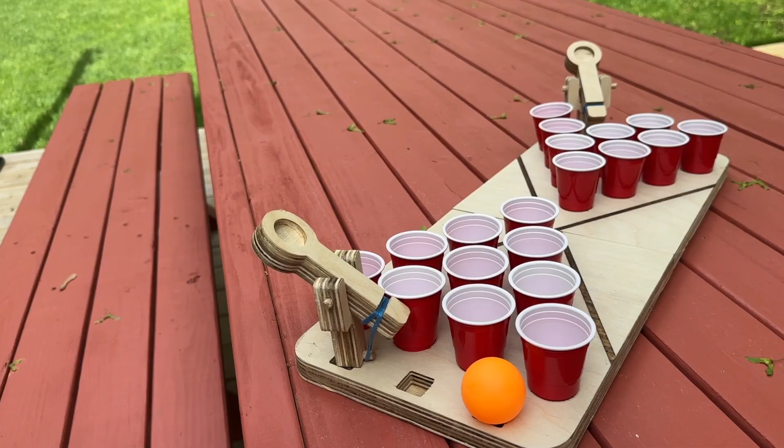This was a longer and more complex project to prepare, but one that shows the versatility of both Makera CAM and the Carvera Desktop CNC.